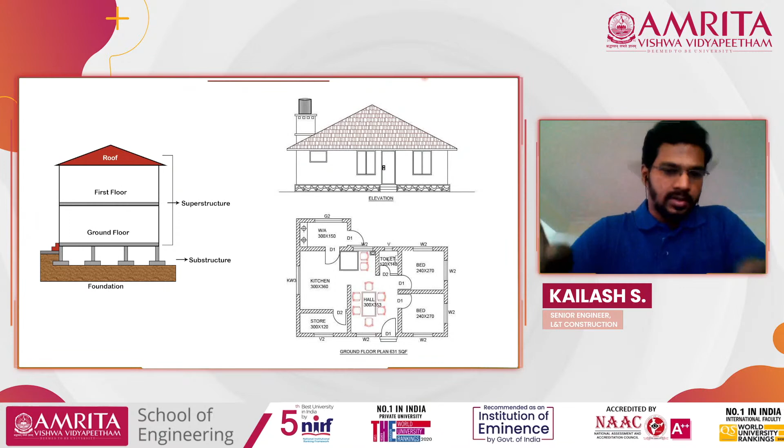I'll be touching small parts, and I'm well aware that the participants of this session are 10th, 11th and 12th grade students who are going to give their board examinations and will be stepping into college in a few months. So you will not be familiar with civil engineering terms. In order to understand the advancements in the construction industry, you need to know some basic terms so that you'll be able to understand how these advancements are happening.

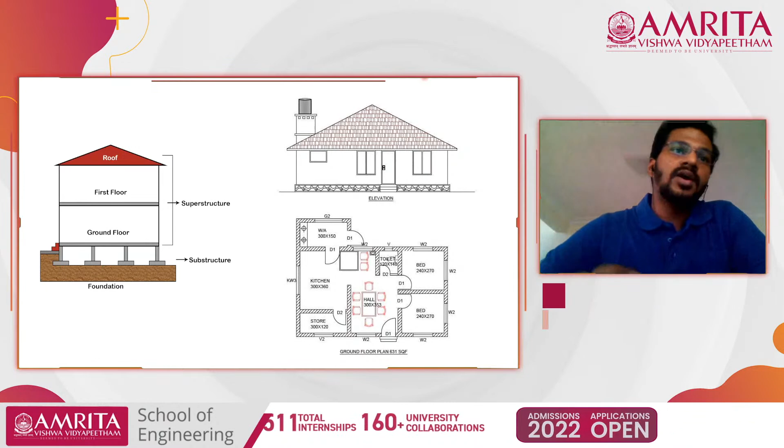To start with, in the left of the presentation you can see an image showing a building with a foundation which carries the load of the building above it and transfers it to the soil. Then you have the ground floor, a ground floor grade slab, columns, beams, the first floor slab and roof slab. This is basically how you picturize a normal building.

On the right hand side you have the drawing—basically a plan and an elevation. The plan shows where your different rooms are located, different doors and utilities, while the elevation shows how your building looks when you're standing in front of it and looking at it.

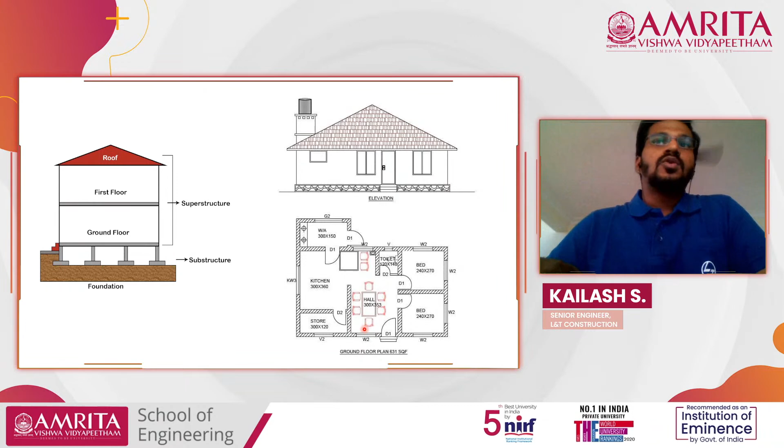You would have seen concrete, which is gray and black in color, which has rocks—to describe it in a crude manner, it has rocks, soil and cement. Concrete is basically a mixture of cement, sand and coarse aggregate and water. Coarse aggregate, to put it crudely, is rocks above 4.75 mm.

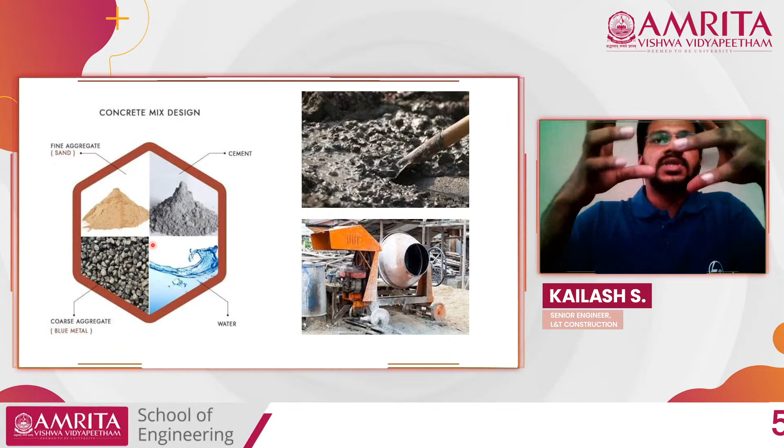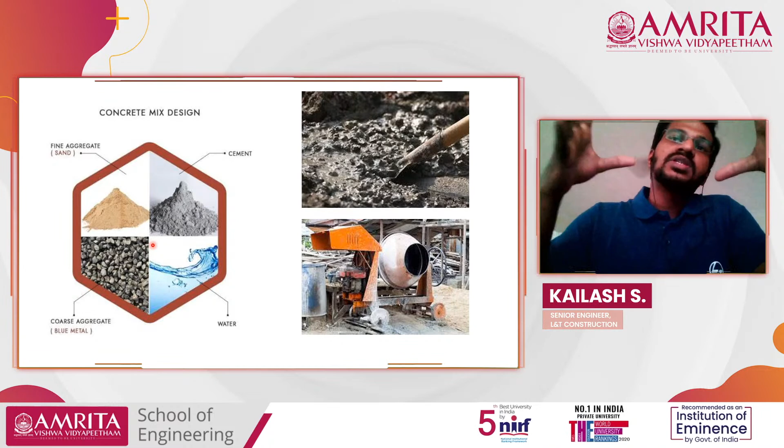In concrete, cement performs the function of binding the coarse aggregate and sand, keeping it in position. Cement reacts with water, an exothermic reaction happens, and then it solidifies—a hydrated product is formed which keeps the sand and coarse aggregate intact in position.

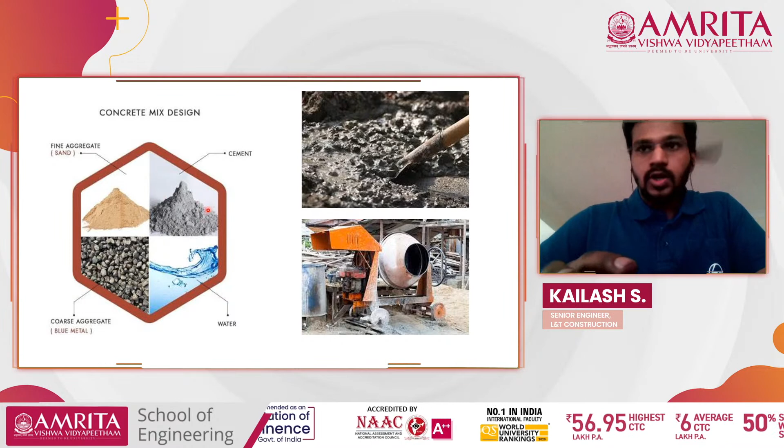So now how do they mix this concrete and lay it inside? In the bottom right, you can see a concrete mixer, which most of you would have seen. Basically, laborers put the coarse aggregate, sand, cement and water, mix it, and then take it to the site and lay it inside. This you can see in small construction sites.

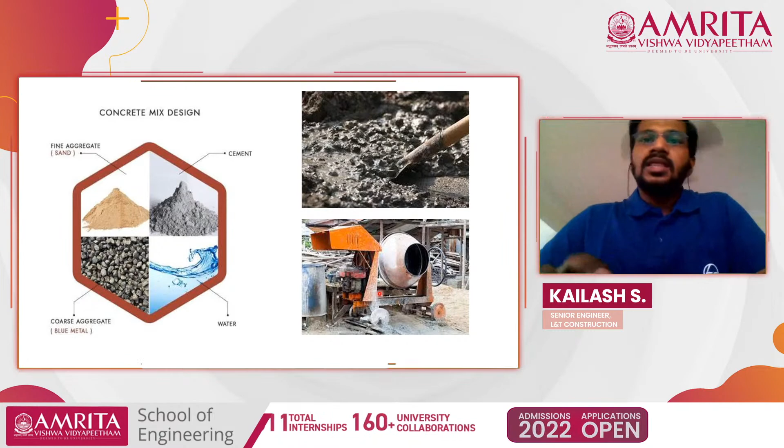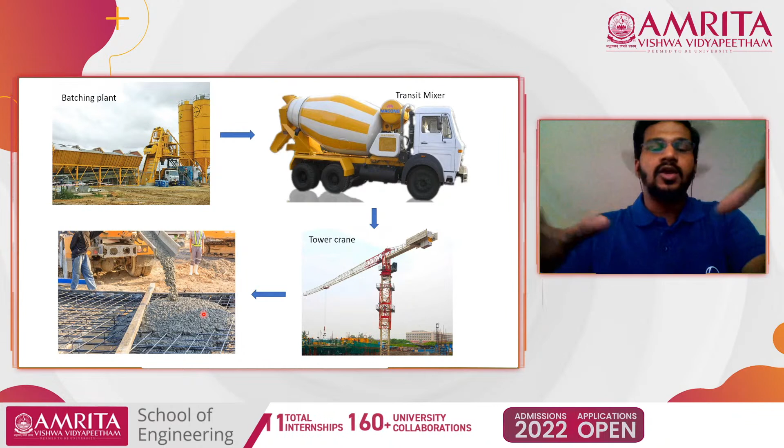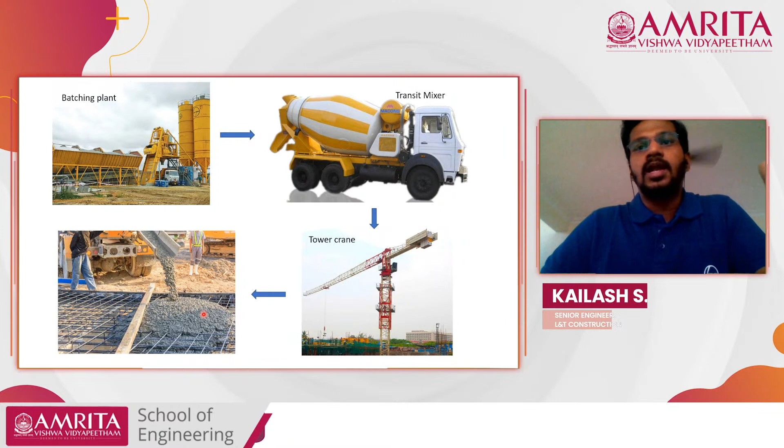So entering into the topic of 3D printing of concrete, firstly we'll see what is 3D printing. 3D printing is basically an additive manufacturing process where we build and deposit layers of material to create a three-dimensional part. This is exactly the opposite of the subtractive manufacturing process which we usually follow. You can see on the bottom left, in order to obtain this material from this solid block, what we do is cut this portion to obtain this part. This is the subtractive process.

Against this, in the 3D printing process, what we do is we deposit layer by layer in the desired location where only we require the material to be deposited. So ultimately, there is less material wastage in 3D printing. This is general 3D printing in various industries. Now 3D printing is extensively used in the medical industry.

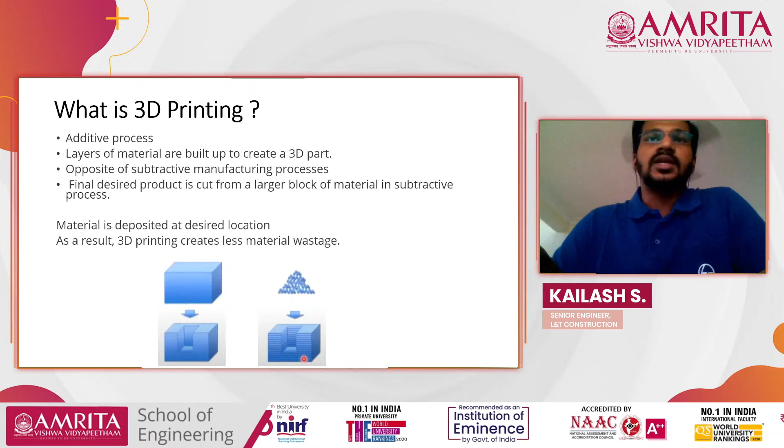Now why 3D printing in the construction industry? Because we have been using the conventional method of concreting for so many years, how is 3D printing helping or going to help the construction industry? First is the reduction in construction time, because by printing, we are mechanizing the process - your machines or robots are going to print the materials for you. So what happens is, when there is less human intervention, there's going to be reduction in construction time. Because of the less human intervention, there is less labor involved, so there is reduction in labor cost.

Thirdly, it is formwork free. Many of you might be thinking, what is formwork? It's a civil engineering terminology. In the left hand side image, there is a footing, and then you can see a wall where metal rebars are tied and laborers have poured in concrete. Concrete in its fresh stage is semi-solid or semi-fluid. Once the reaction commences, and after a certain period when the reaction is complete, you get solidified concrete. Until it is solidified, you need to keep the concrete in position so it can acquire that shape - so we keep metal or wooden shutters to keep the concrete intact in its position until it is cured or set. This is called formwork.

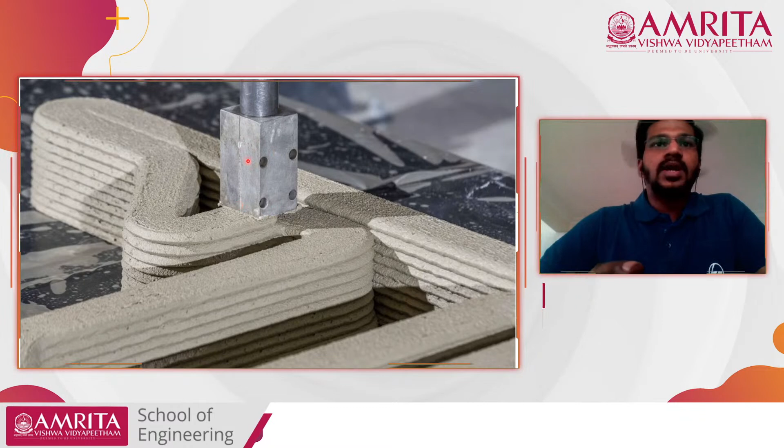In 3D printing, what we are doing is depositing it layer by layer. I'll just show you an image - this is basically 3D printing of concrete. You have a nozzle which is printing or depositing the concrete layer by layer in a predetermined path. So because you are printing it layer by layer, there is complete elimination of formwork. In regular concrete construction, usually 30% of the cost goes to formwork and 60% of the time is consumed in shuttering and deshuttering of the formwork. This is completely eliminated in case of 3D printing.

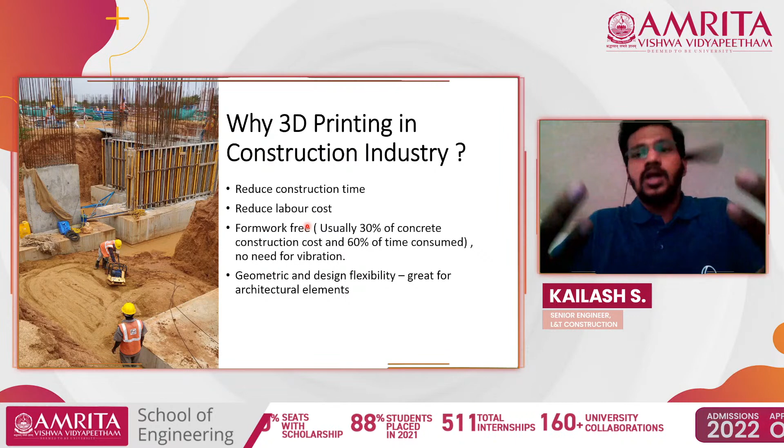Next, coming to the most advantageous part is that it gives you the geometric and design flexibility of building complex structures which we cannot attain using the conventional method of concreting.

Now let's see the process involved in 3D printing of concrete. Initially, we create a three-dimensional model. For buildings, we normally conceptualize and make 2D drawings - plan, elevation, and sections. But the first step for 3D printing is you need to have a three-dimensional model of the building or the part you will produce using 3D printing.

We create the 3D model and then slice it into several layers with thickness equal to the deposition thickness. So we divide the building into slices, and the path the nozzle has to follow is predetermined and fed into the machine, and then the 3D printing happens. After printing the concrete, post-processing like curing and grinding if necessary are done, and then you get the final product.

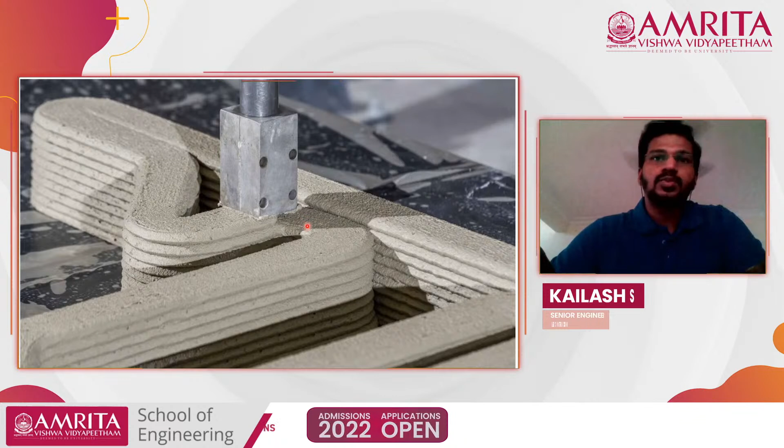So this is the image which we have already seen, where the nozzle follows a predetermined path set by the machine and then deposits it layer by layer.

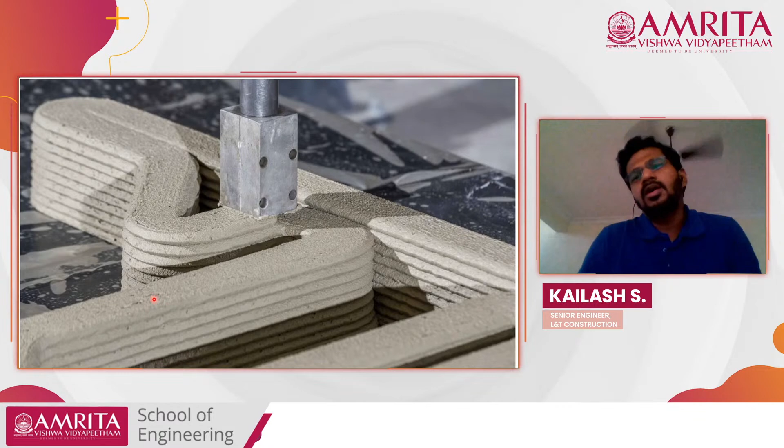In the robotic arm-based system, you have a robot or machine sitting in one corner, and it has its arm which can move about different positions and deposit the concrete.

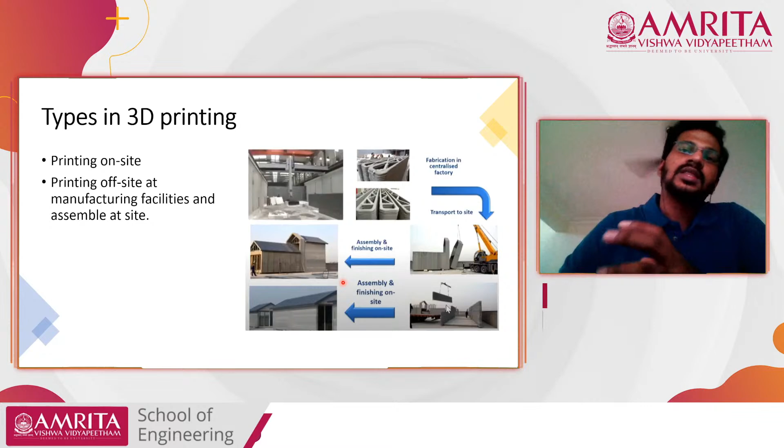Coming to the types in 3D printing, as I said earlier, either you can have the machine directly on site printing your entire building, or you can divide your building into several modules. These modules can be printed at sophisticated large factories where you have space, then transported to site and assembled and grouted.

Any new advancement has its challenges for implementation. Now we'll see the challenges in 3D printing of concrete. First of all, the main challenge is creating the mix design. Basically, a concrete mix design is the most important part of any concreting purpose, because the strength of the concrete is dependent on the mix design.

We need to be able to print concrete with coarse aggregate. Whatever projects have been done till now, more than 99% of them use only fine aggregate, which is sand, because you need the coarse aggregate to come out of a nozzle. Nowadays, because of COVID, we are familiar with hand sanitizers - you have a nozzle through which, once you press, the sanitizer comes out. Similarly, you need concrete coming out of a nozzle when it's moving around and depositing. When you have coarse aggregate, that is rocks of larger size, it's going to be difficult to make it come out of the nozzle.

Second is reinforcement printable concrete. All the projects which we have done using 3D printing of concrete use only aggregate in the concrete. We are not using reinforced cement concrete, because while printing, you cannot print the reinforcement - metal cannot be printed along with it, because the fluid to solid transition and solid to fluid transition of metal is at a higher temperature, which cannot be achieved at the same time.

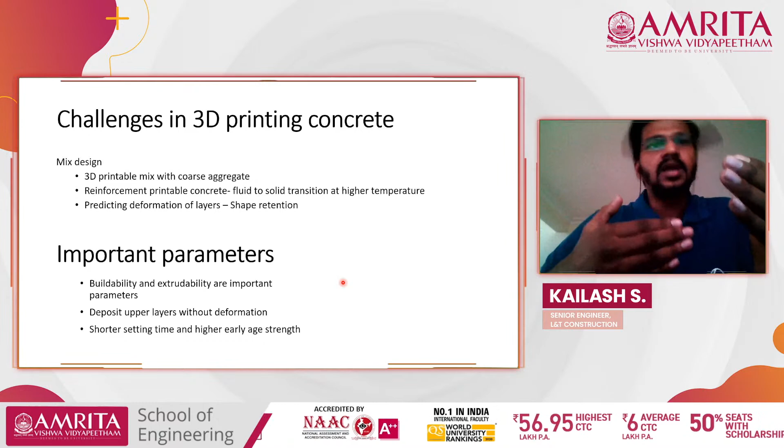The important parameters which we need to consider when we go into 3D printing of concrete are buildability and extrudability. Buildability is basically that the layers should be able to hold the weight of the upcoming layers which are to be deposited, and extrudability is that it should be workable enough to be able to extrude it, or make it come out of the nozzle.

So that's what is said in the second point also. The deposition of upper layers should happen without deformation of the lower layers. So the lower layers should have a shorter setting time, gaining early strength in order to sustain the loads of the upper layers.

Coming again to the challenges while printing concrete, these are all general challenges in 3D printing of concrete. While we are printing, we need to know what strength is attained by the lower layers, to ascertain whether the below layers will be able to hold the upper layers.

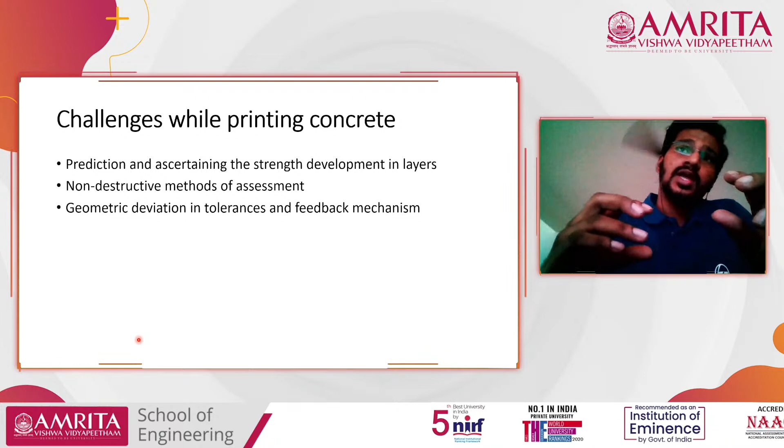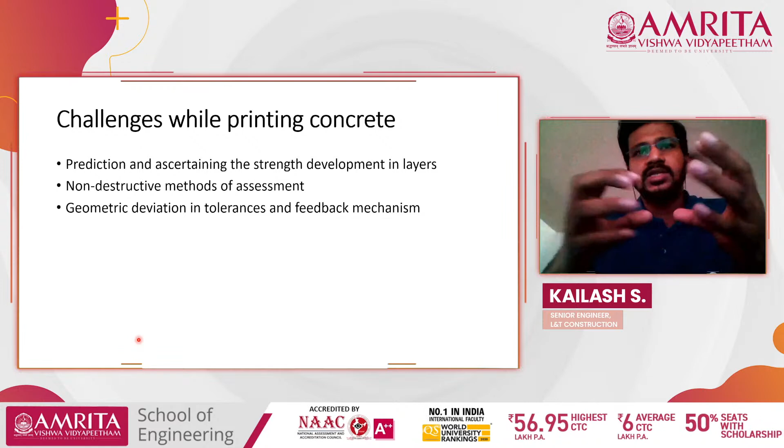Because concrete is basically not a manufactured product. You have sand and aggregate, which are derived from natural products, so the strength is going to vary. You need non-destructive methods of assessment to know whether the strength is attained in the lower layers to sustain the loads of the upper layers.

Then comes the geometric deviations. If there is a deviation in the printing of the first layer, it keeps on compounding as the second, third layers keep printing one after another. The deviation compounds, and if you are planning a straight building, you might end up with a tilted building while printing. So you need a feedback mechanism by which the deviation is learnt by the machine and corrected in the upcoming layers.

Now I'm showing you some of the failures observed while doing 3D printing of concrete. You'll have slipping of layers as shown in the first image, where there is no sufficient adhesion between the layers, so one entire layer slips off from the layers below. In the second image, there is too much water introduced in the hose, causing a flow of concrete that doesn't stay in position.

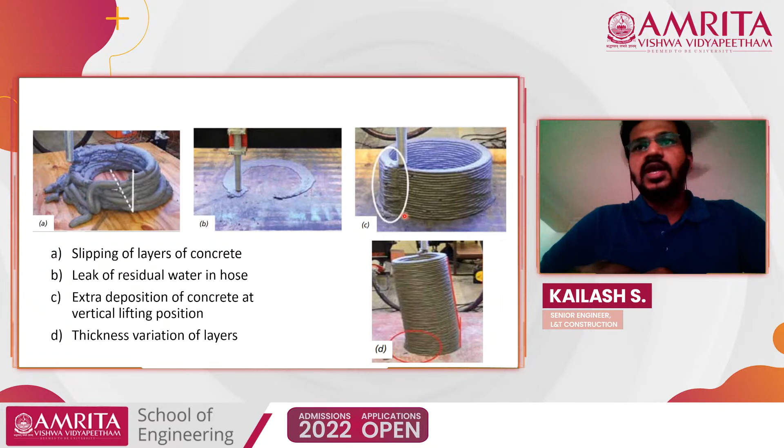Thirdly, you can see extra deposition of concrete at a single location. This is because after printing a single layer, the nozzle increases its height to start printing the second layer, and due to gravity at that time, extra concrete gets deposited at that position.

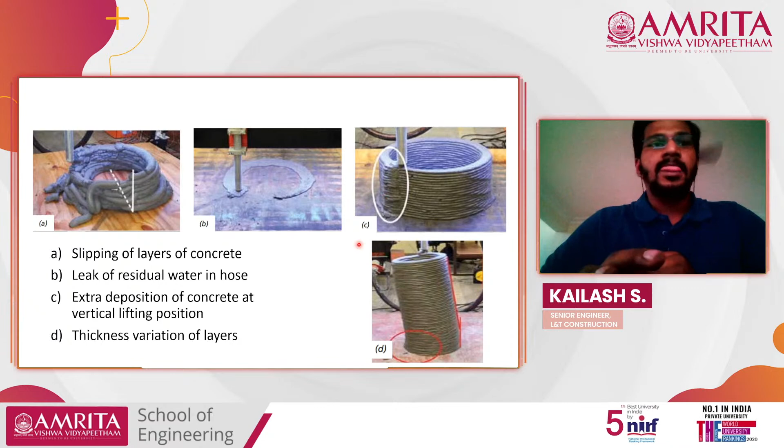Then you have variation in thickness of layers. The thickness of the layers at the bottom is not uniform, because of which the structure has tilted.

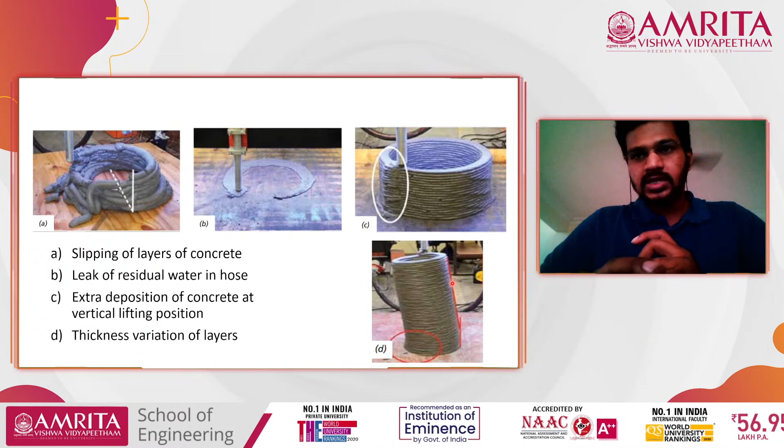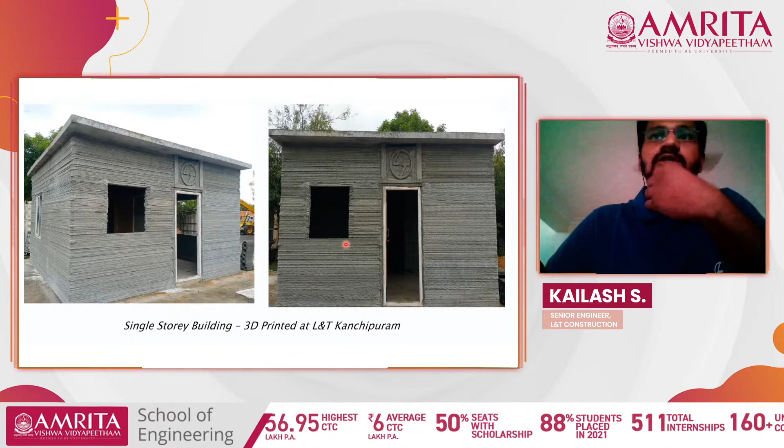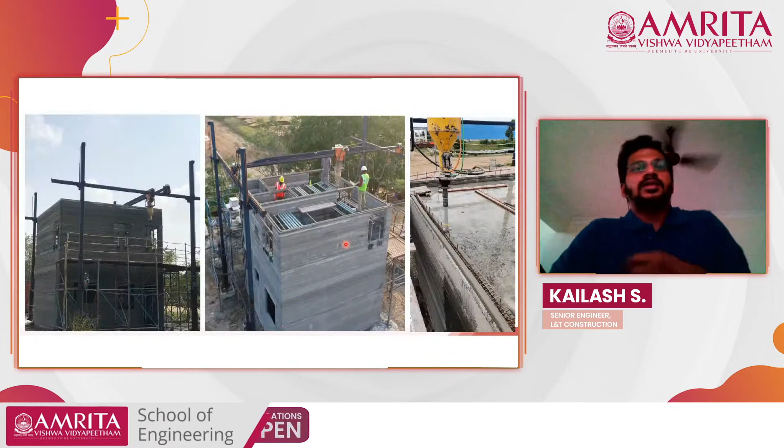So this is about 3D printing of concrete. Coming to our next topic, which is building information modeling.

By building information modeling, what we crudely understand is just a three-dimensional model. But BIM is not just a three-dimensional model, it is a three-dimensional model which has information built into it. We have 2D softwares like CAD, AutoCAD, where we do two-dimensional plan drawings, sections and elevations, and the basic elements in these drawings are usually just lines. But in a BIM model, the basic building elements are the building elements themselves.

You don't draw it as lines; if you are drawing a wall, you draw it as a building element, a wall. Information can be tagged to each element. For instance, if you're going to construct a wall in this place, you can have details like material specification, whether it's a solid block, AAC block, or concrete wall, what cement plaster thickness is going to be placed above it, what texture of finish, and what paint shade can be added, so you get all the information.

The major advantage of having a BIM model is you get detailed quantity estimation. There is a separate department of quantity surveying in almost all construction companies to calculate the quantity of different materials, which helps them with scheduling and procurement activities. When you tag information into the model at the initial design stage itself, you get to know the quantity at a click of a button.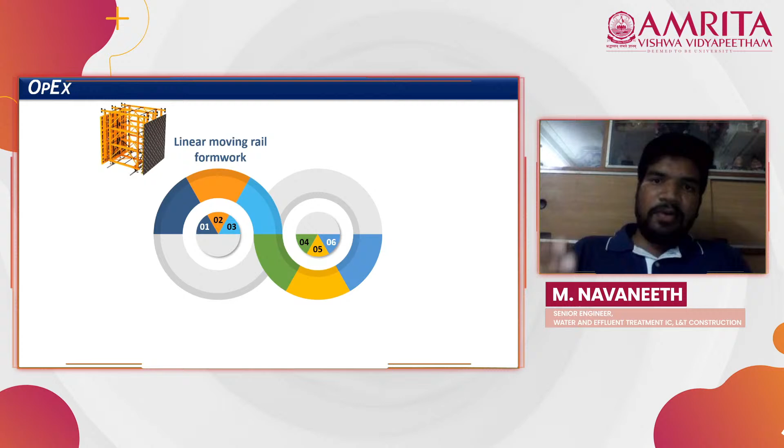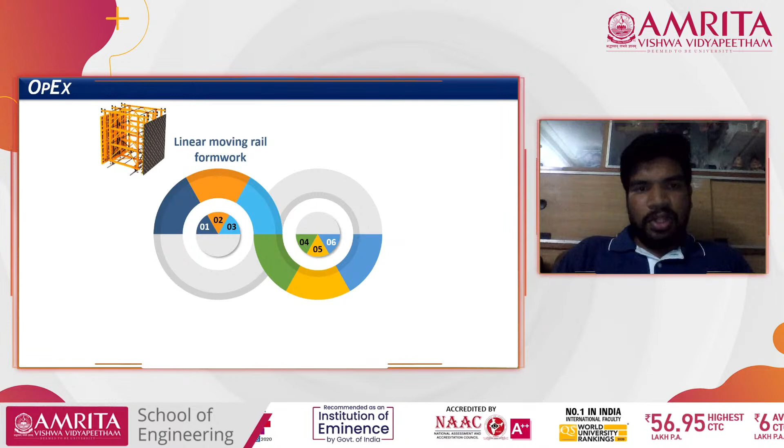Now I will show you some of the initiatives which we have taken up for our own sewerage treatment plant project. Here we have to construct the walls of the large tanks which store the wastewater, where the treatment process takes place. Normally in the conventional method, you have to keep the whole formwork for the whole structure, and then pour the concrete. Formwork, as I told you earlier, is the temporary structure to hold the concrete until it attains strength to set on the position on itself. So when you're using formwork for the whole structure, it costs you more, and the time for fixing the formwork is also more.

So we propose this method - linear moving rail formwork, wherein you have a moving rail with a formwork attached to it. As one part of the structure is completed, the formwork is moved using the rail, and then consecutive parts are constructed. This way you can save both time and cost.

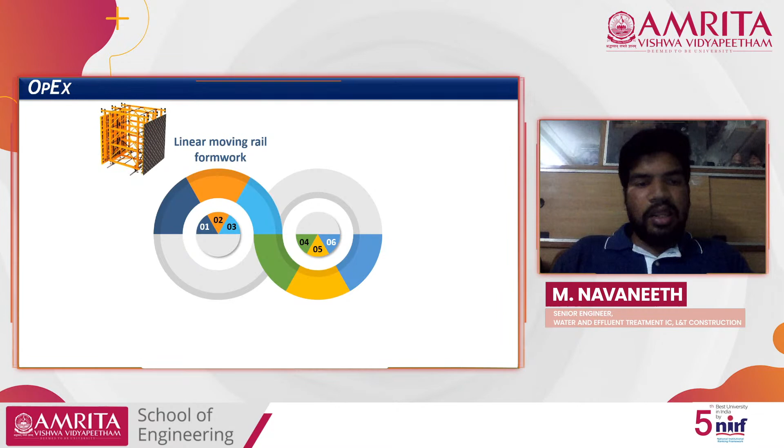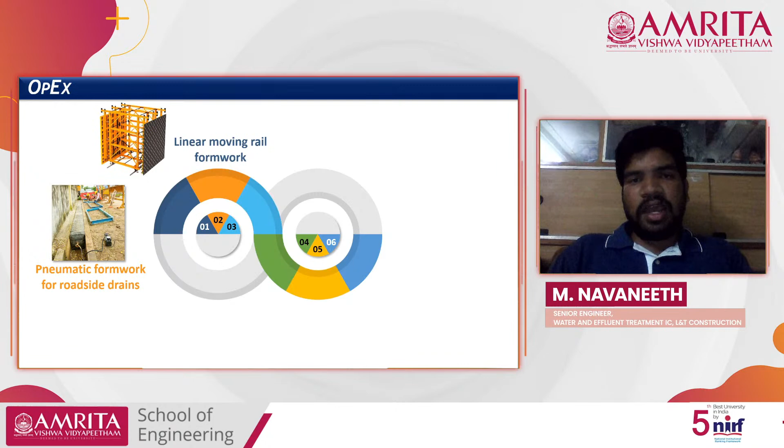And the next one is pneumatic formwork. This can be used for drains you can see everywhere, even outside your houses - the sewerage drains which are going. You might have seen the top caps constructed of concrete placed over the drains. Normally the conventional method is to place these lids in a casting yard, cast them, then transport and place them in these locations. For reducing the transportation cost, we can place pneumatic tubes in the drains, and over these pneumatic tubes we can place a frame and cast it at the same site, so we can save on the transportation cost here.

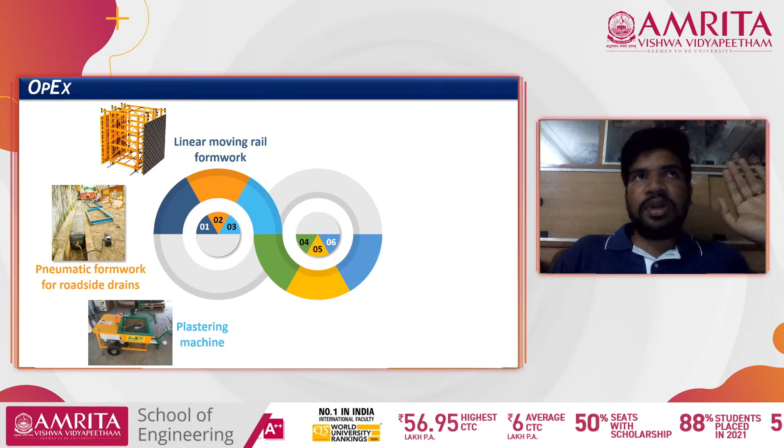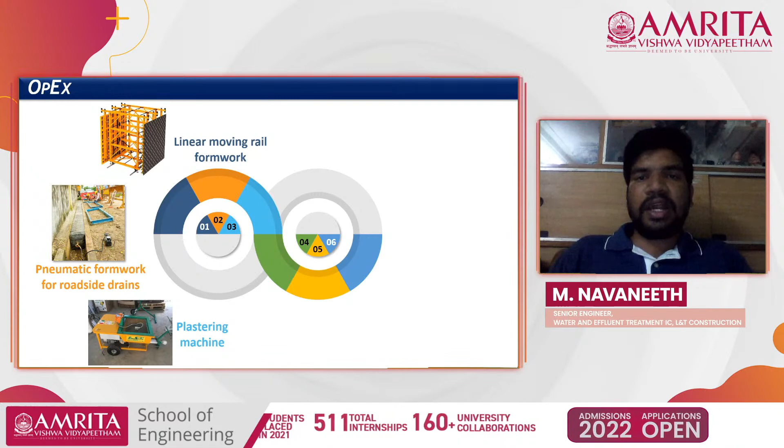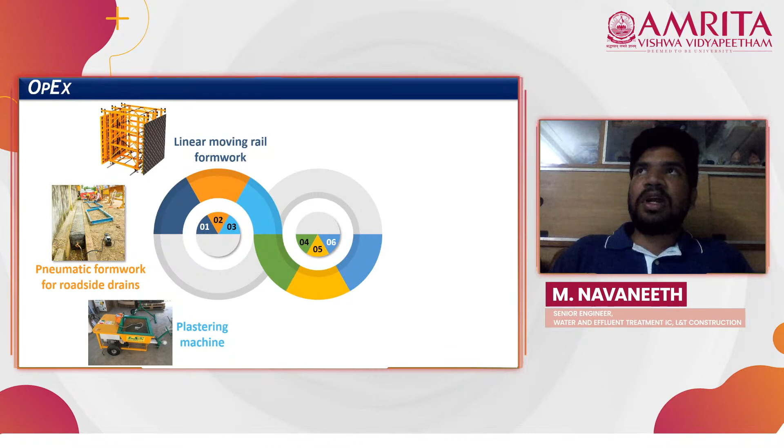Another one is the plastering machine. Plastering is after you construct walls out of bricks and mortar, you have to give a finish—like a smooth finish. For that, you plaster it using mortar, which is sand and cement. Conventionally, using a trowel, you put it over the walls manually, so this takes a lot of time—covering a wall takes a day. Using this plastering machine, this can be done in an hour, and you also get even thickness all over the walls.

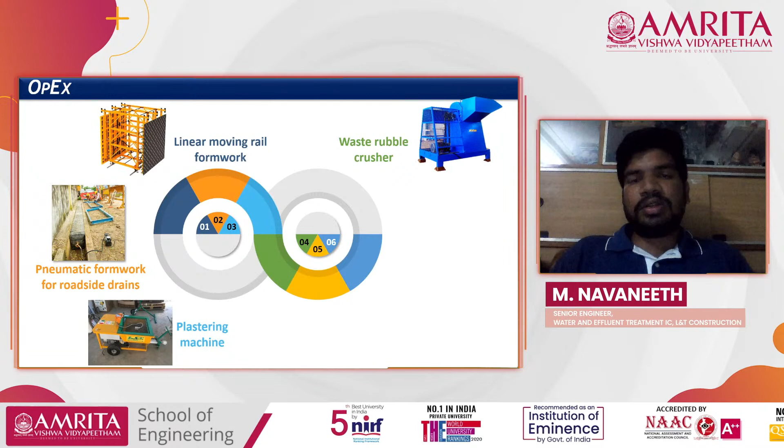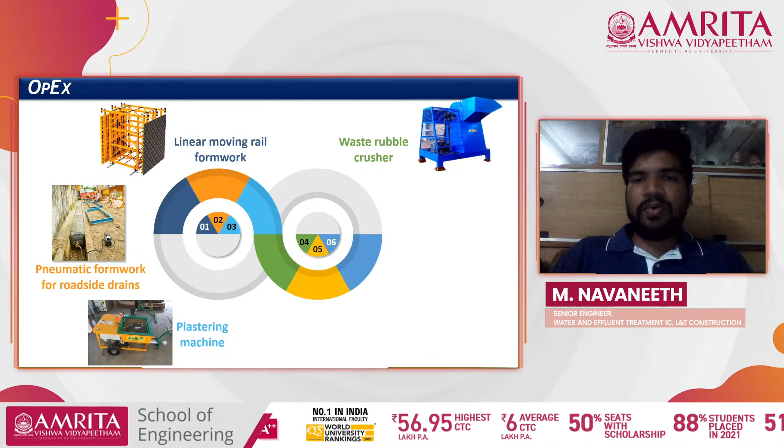The project we executed was rehabilitation work—we had to demolish the existing structure and construct a new one. Using this rubble crusher, we crushed the demolished structures and used it as backfill, since we normally excavate the earth and backfill it for strength. So we did not waste the demolished material, and this is one of the sustainable features.

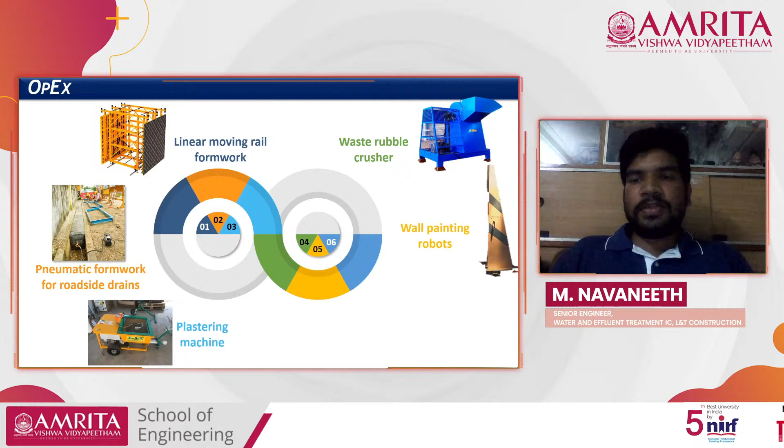Another one is the wall painting robots. Rather than painting conventionally, we proposed using painting robots.

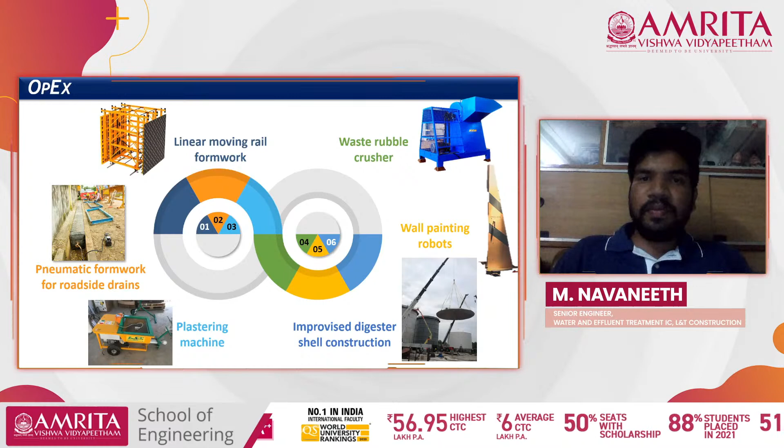Another one is the improvised digester shell construction, for the construction of a dome. Normally, in the conventional method, we have to take the formwork from the bottom of the structure to the top, which costs more and takes more time. So we proposed placing it using a shell precasted in the yard, and using a crane we can place it over the top. This saved more time.

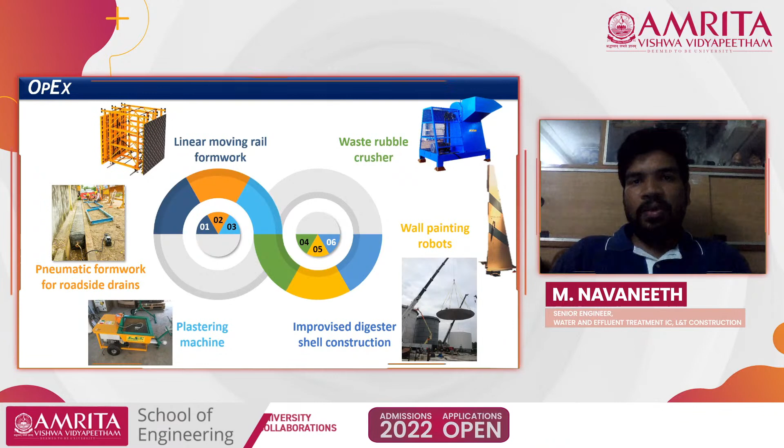Then this is a video just to show you how this plastering machine works.

Then this is also used for plastering work—a cement spreader tool. Normally the mortar is placed between the bricks using manual labor, but this spreading tool will help in placing the mortar in an even shape.

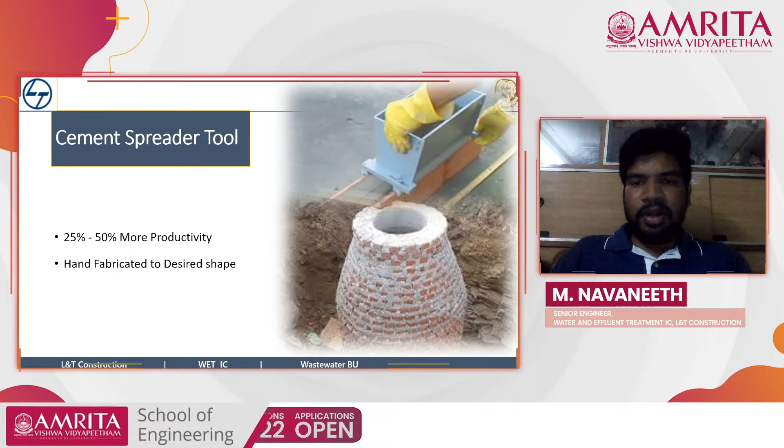Here is a video. The size and shape can be adjusted—you need not even it out manually.

Next, as I said, the waste rubble crusher—these are some of its features. And here is a video.

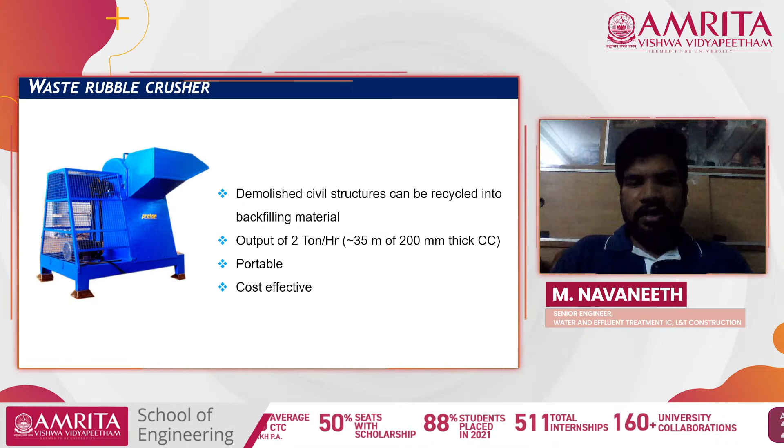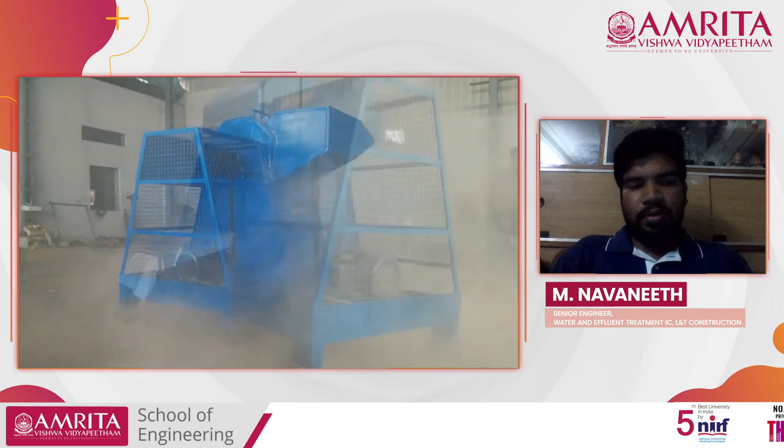Then this is the video on the painting robot.

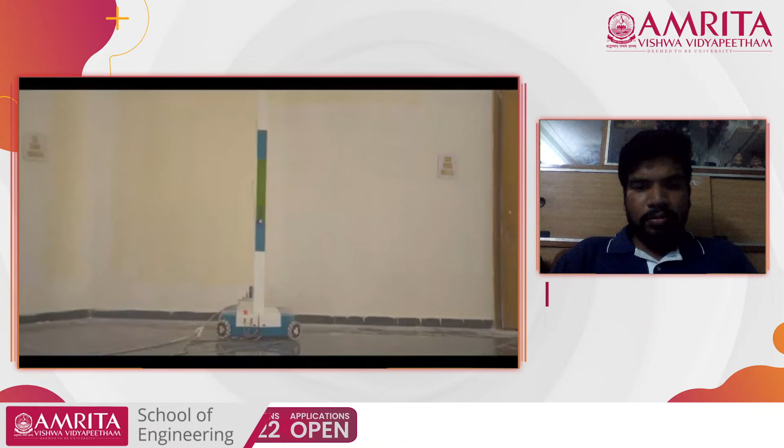Introducing Walt, our robotic painting assistant that can paint 30x faster, enabling you to stay ahead of the market by months. This modular robot is easy to set up and use. It has a top speed of 60 square feet per minute, increasing the average output of a 3-painter team 10 times over. But that's just the beginning. Walt not only takes care of paint, but handles primer and putty just as well. Painters can control it with ease using our Android app. It is a plug-and-play mechanical system programmed with an intuitive graphic interface. What makes Walt really awesome is that it's smart. It can automatically paint a wall while precisely cutting off at windows, switchboards, and other non-paintable elements on its way. It remains parallel to the wall by correcting itself for any physical perturbations. Walt always sprays at a constant speed and from a constant distance, which gives the most consistent and smooth finish.

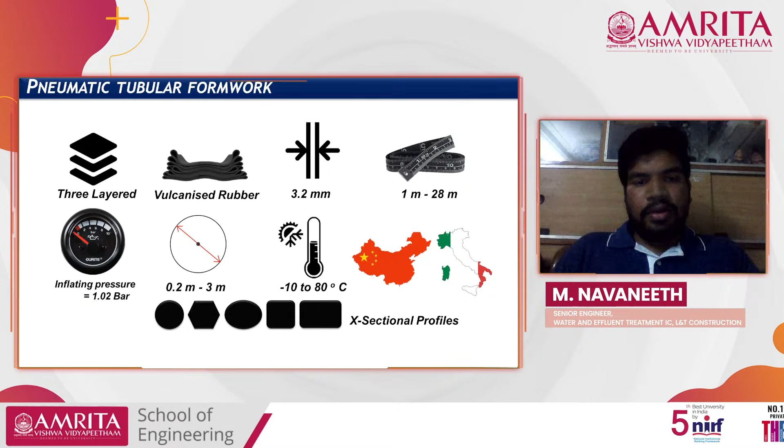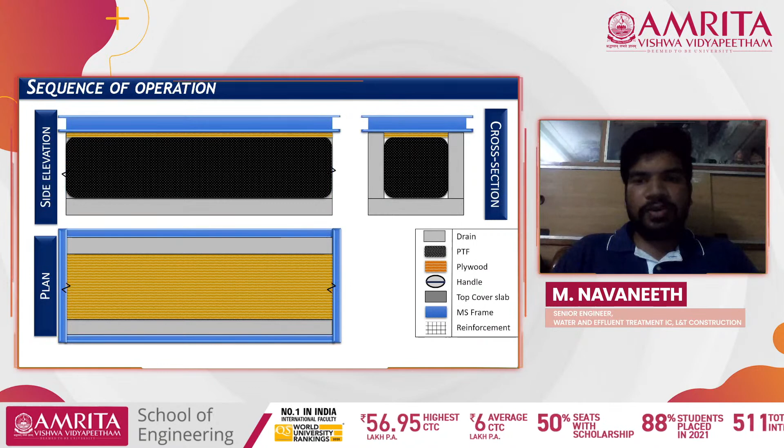Then these are some of the features of the pneumatic formwork. It is made of vulcanized rubber, and you can get it according to whatever cross-sectional profile you want. This animation shows how it works: you place the deflated pneumatic tubular formwork inside the drain, then inflate it, then place plywood over it. After that, you place the frame into which you are going to pour the concrete, then place the rebars into it.

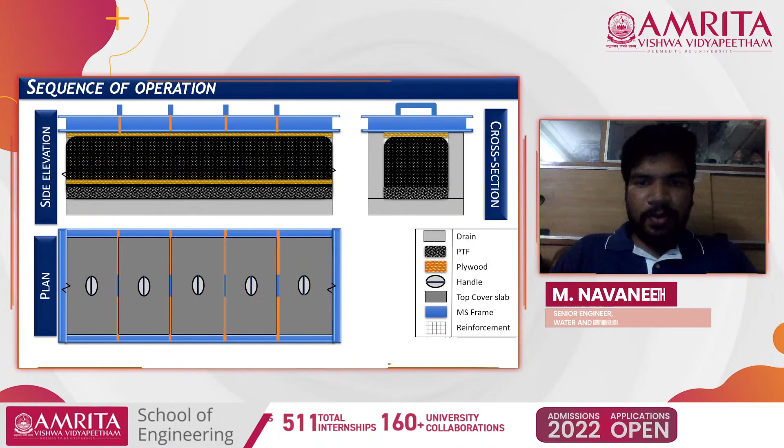You fill it with the concrete. Then when you deflate the tube again, the tube and the plywood can be removed. And later, when you remove the frame, you get all these covers placed over the drains without any difficulty in transportation.

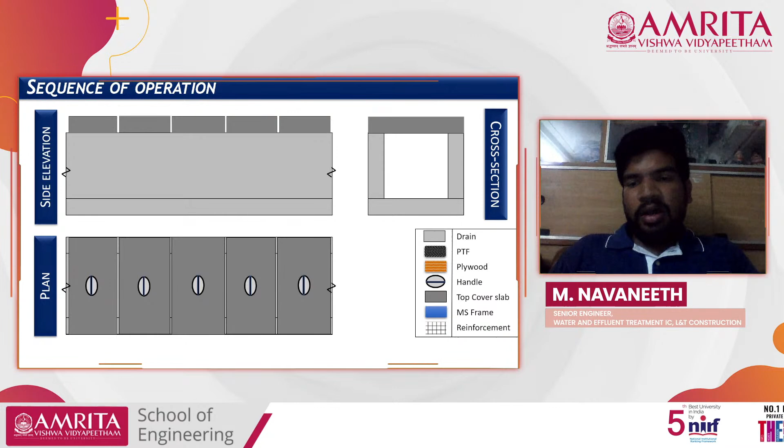Then I will get you into the topic which is an iconic initiative undertaken by us, that is the dusk to dawn construction.

Before I get into it, I'll just say, as the field of construction deals with projects which have huge value, the clients who invest in these projects want to take the returns at the earliest. So what happens is there is scope for so many new technologies, which is increasing, and at the same time we have to take care of the quality and safety. So I say there is a huge scope of technology in the construction industry.

So if you are willing to join the construction field, you just have to get knowledge about the new technologies, and you have to learn new softwares or technologies to stay ahead of others. So I'll just get you into this dusk to dawn construction.

Basically, the problem which we face in normal projects in India is the time overrun. Normally, a construction project is of a duration of 2 to 4 years. But what happens is, as per statistics, the projects have a time overrun, like the projects get delayed on an average by 29 months, which is more than 2 years. So when a project of 2 years is getting delayed by 2 years, you have to spend more cost and more time. So that is a major issue.

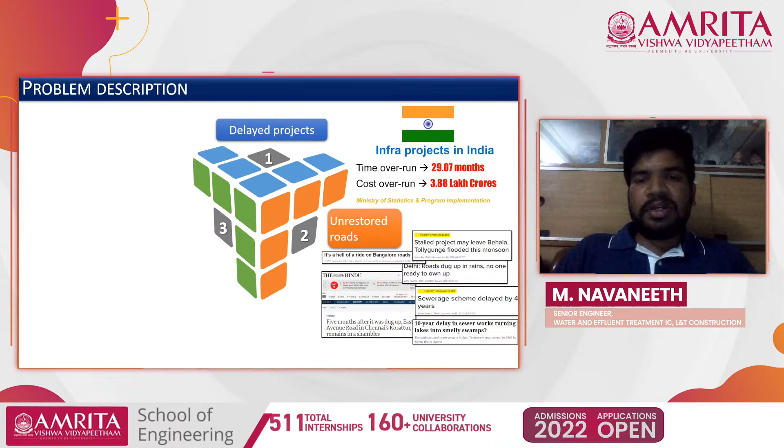And one more thing is both are interdependent. When the time is going overrun, then the cost obviously is more because you have to spend on the labor, the machinery, whichever you've got. Another thing is the unrestored roads. Normally you would have seen in your localities, people dig the roads for different purposes, like laying the cable, laying the pipes, and they leave it unrestored for so many months. This gives inconvenience and creates threat to the public, like it causes accidents and there are even fatalities due to these unrestored roads.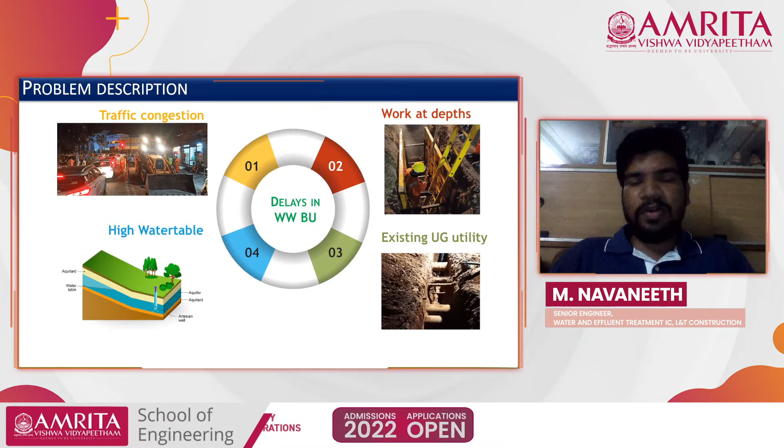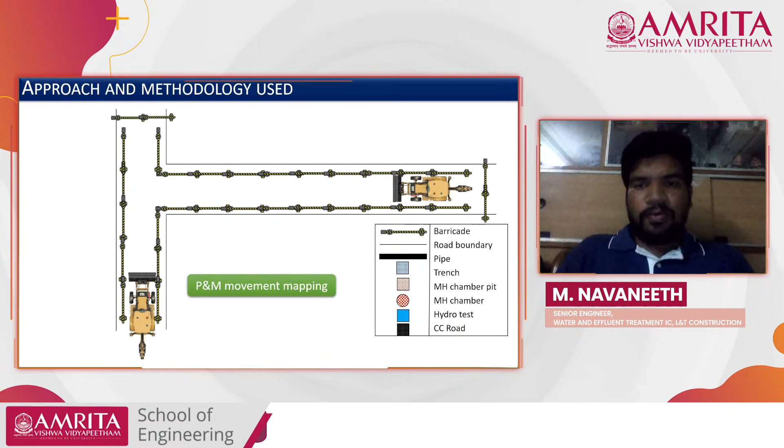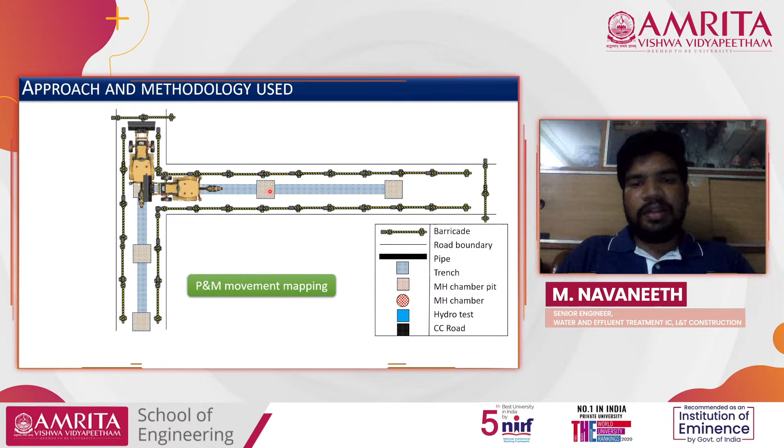And the approach methodology which we use is planning, initially mapping how we are going to proceed with the work. So these are the barricades. As you can see, these are the barricades and these are the excavators moving along the road, and they are excavating, digging above the soil, as per the plan.

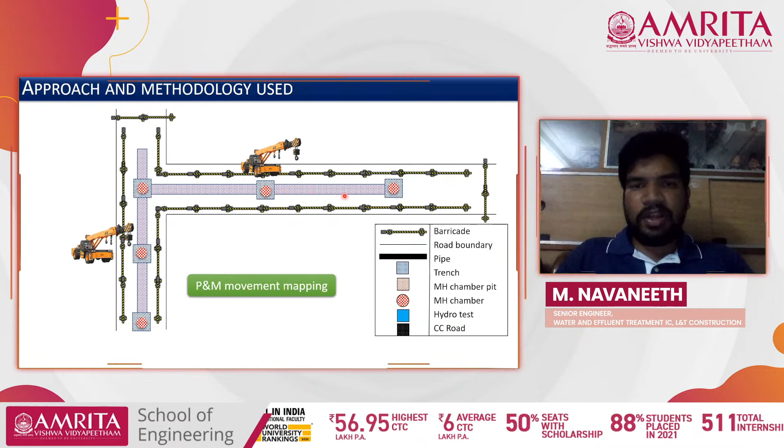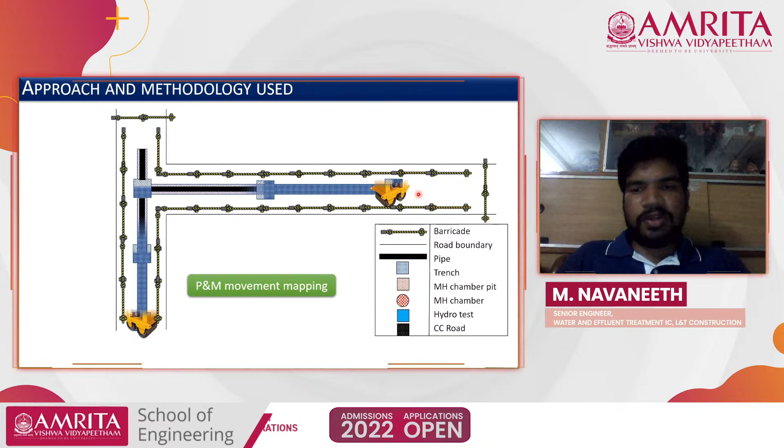Next we place the manholes using these lifters, and using this lifting arrangement we place the manholes in position. Then we pour water into it and hydro test it. Then we lay the pipes and we again hydro test it by filling the water. After which we backfill the soil and compact it using the rollers, and we lay the road. This is the normal procedure which we use for the pipe laying works.

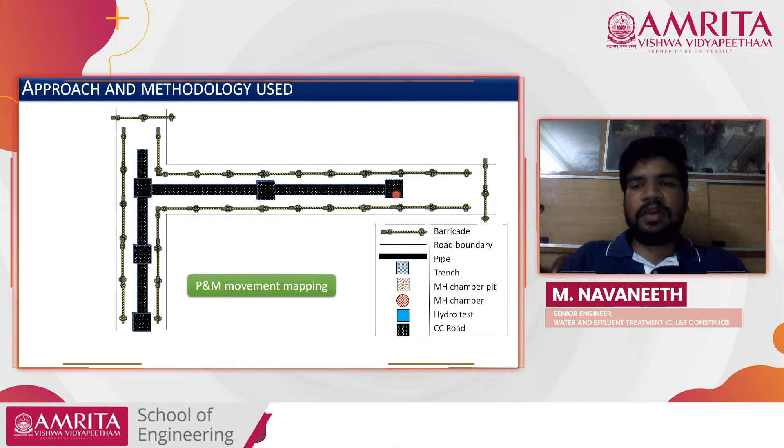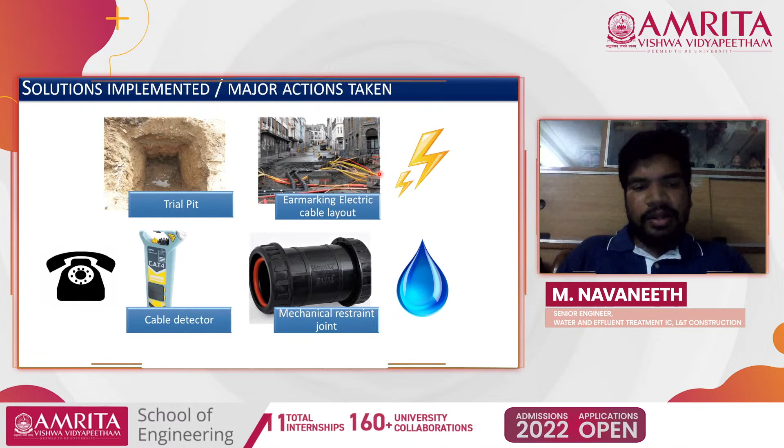Next is using technology like cable detectors. We found where the other utilities like water lines or cables are running, and according to that we can plan our location of excavation.

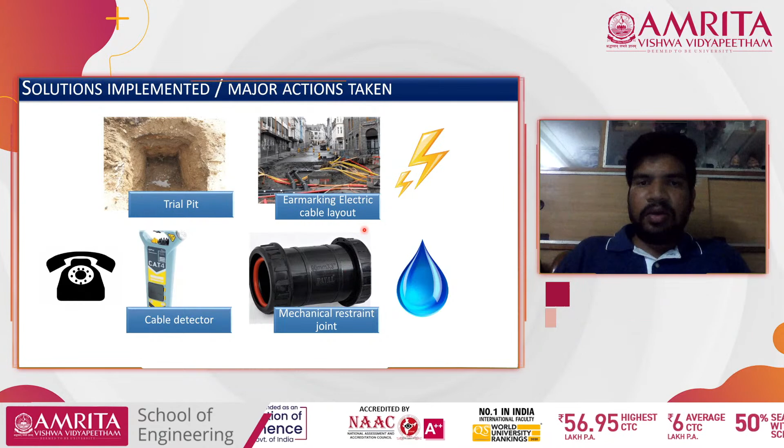Normally the pipes are joined using electrofusion. It takes some time for fitting the pipes, and there might be leaks. So this is a technology where we use a joint wherein you insert both pipes and tighten it. This saved us time, and it was also better in quality. This is some of the statistics on how much we have executed using this initiative.

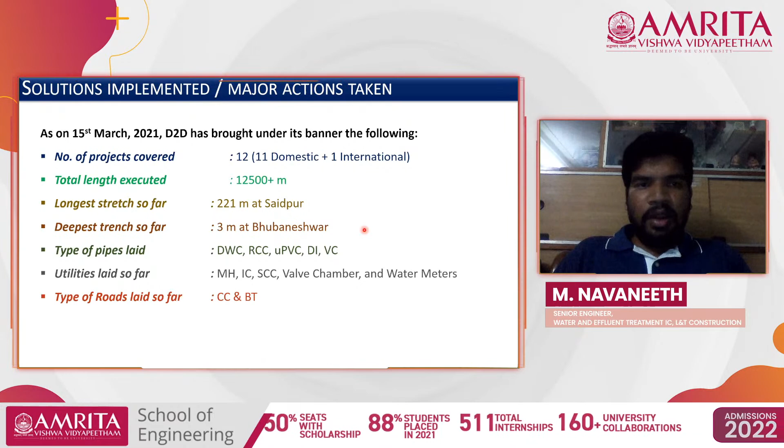Another solution we used is coveralls, for the safety of the workmen since they are working at night time. So coveralls with reflectors were used.

Kiran, is it a network issue from Navaneeth's side? Sorry all, we are facing a network issue.